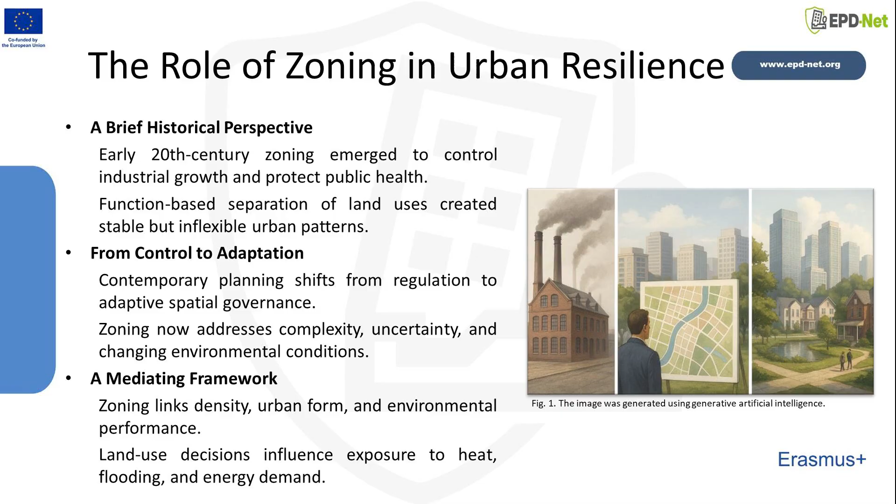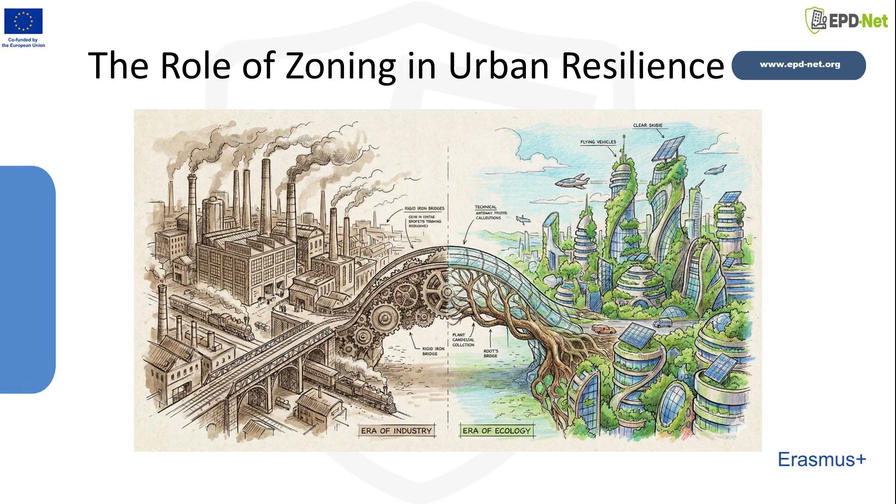Through the regulation of density, urban form, and land use intensity, zoning directly shapes environmental performance and resilience. Decisions about how land is allocated, how buildings are arranged, and how open spaces connect to ecological systems influence heat exposure, flood risk, and energy efficiency. In this way, zoning becomes not only a regulatory framework but also a dynamic mediator between the built environment and the natural systems on which cities depend.

Zoning systems were originally created to provide stability and predictability in urban development. They sought to organize land uses, prevent conflicts, and maintain a sense of order within the growing industrial city. However, the complex realities of the 21st century, such as climate change, rapid technological progress, and evolving social needs, have exposed the limitations of this fixed and prescriptive approach. Adaptive zoning offers an alternative way of thinking by transforming zoning from a static legal framework into a dynamic process of learning and adjustment. Instead of focusing solely on what can be built, it emphasizes how urban development performs over time in relation to environmental and social goals.

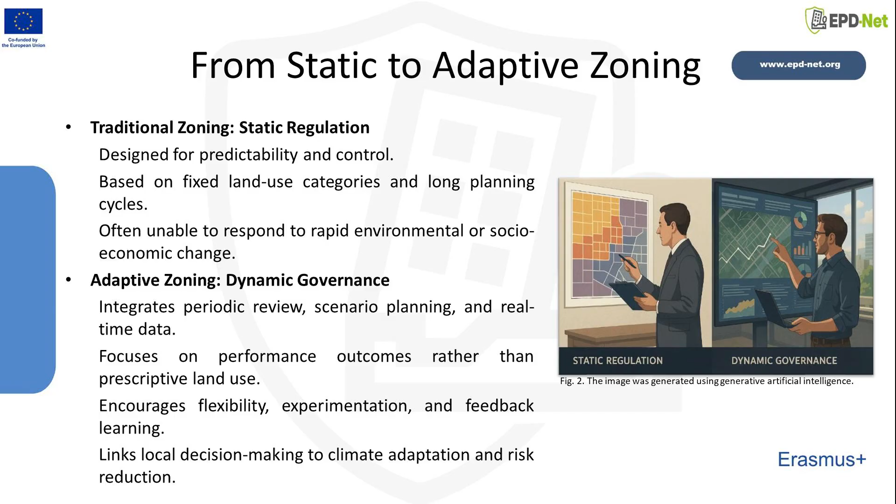It introduces regular review cycles, scenario-based planning, and data-informed evaluation so that local authorities can respond to emerging risks and new opportunities. Through this transformation, zoning becomes an instrument of resilience rather than rigidity. It enables cities to remain responsive, to integrate new knowledge, and to align land use, density, and environmental performance with the broader objective of long-term sustainability.

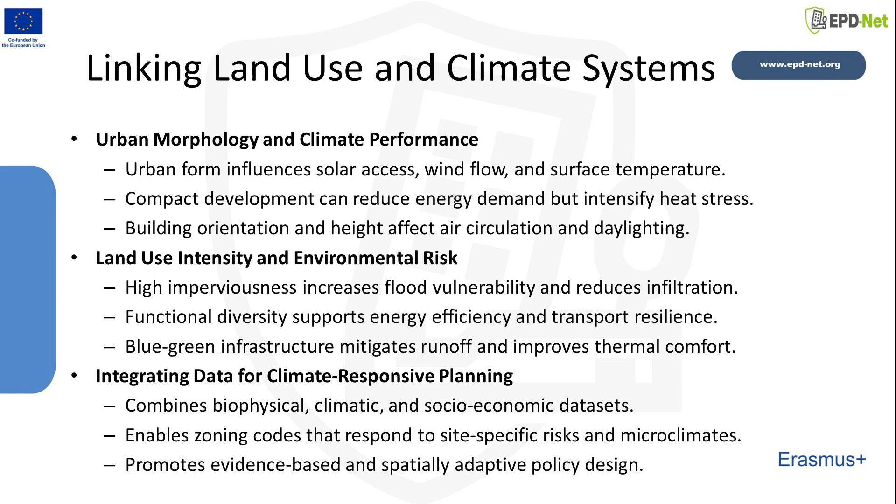The relationship between land use and climate systems lies at the heart of climate-responsive urban planning. Every decision about density, building form, and land use mix has measurable consequences for energy consumption, air quality, and local microclimates. The configuration of the urban landscape determines how sunlight reaches the ground, how air circulates through city blocks, and how heat and moisture are stored or released. Compact and high-density development can reduce transport-related emissions and strengthen social interaction, yet it can also intensify heat island effects if green and permeable surfaces are neglected.

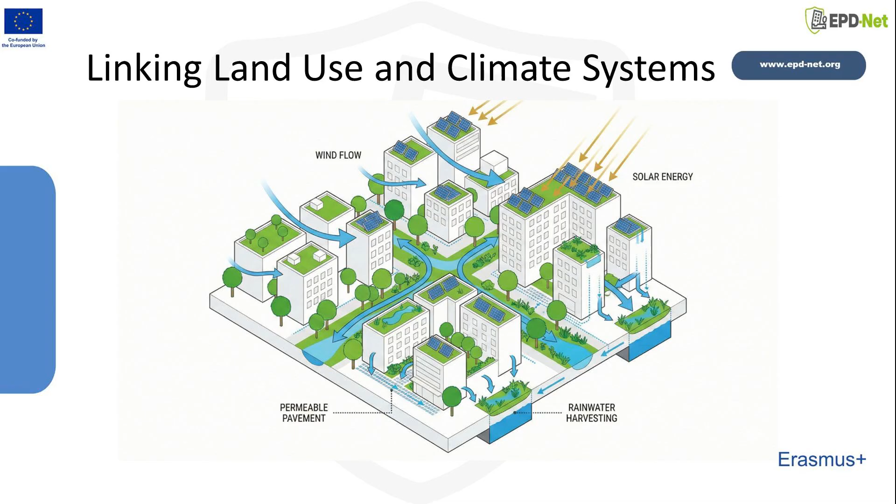Similarly, extensive impervious coverage can increase flood vulnerability, whereas integrating blue-green infrastructure can moderate temperature and enhance stormwater retention. Climate-responsive planning therefore requires a holistic perspective that links urban morphology with environmental processes. By using climatic, biophysical, and socio-economic data together, planners can design zoning codes that are both place-specific and adaptive, ensuring that urban form evolves in harmony with the natural systems that sustain it.

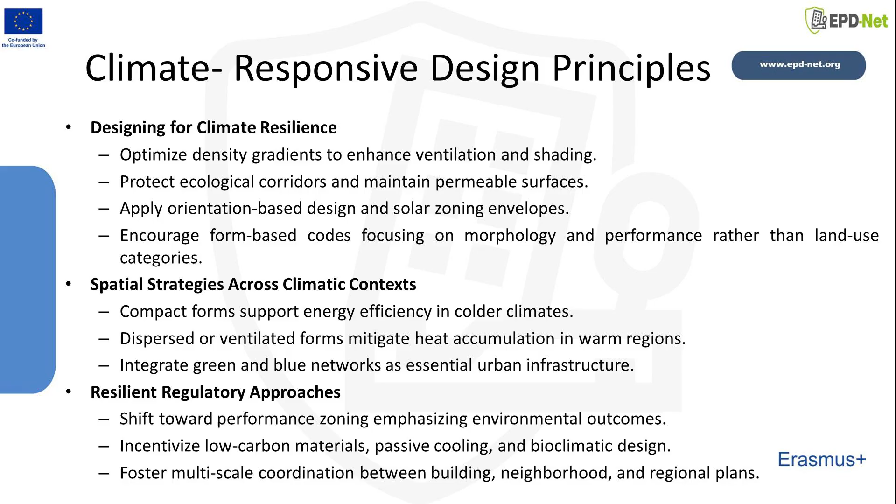Climate-responsive design lies at the intersection of architecture, urban planning, and environmental science. It is rooted in the understanding that urban form must not resist natural processes but instead work with them. The design of streets, buildings, and open spaces influences solar access, air movement, and surface temperatures, which together determine the comfort and energy performance of urban environments.

To achieve this, planners and designers should optimize density gradients to balance ventilation and shading while protecting ecological corridors and maintaining permeable surfaces for stormwater absorption. Orientation-based design and solar zoning help ensure that each development responds to the local sunpath, prevailing winds, and topography.

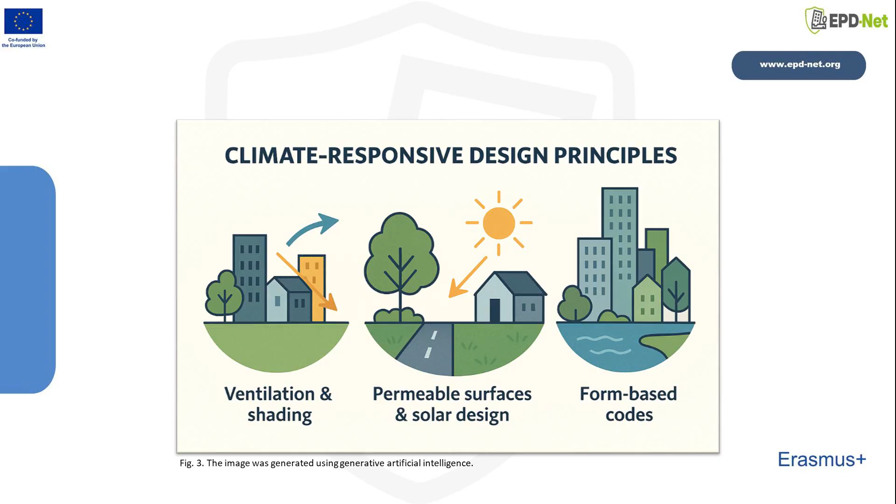Climate-responsive planning also calls for a shift from prescriptive land use regulation to performance-oriented zoning. Rather than simply dictating what functions may occur, this approach evaluates how spatial forms perform under different climatic conditions. By combining compact or dispersed urban forms according to context, cities can simultaneously reduce emissions, moderate heat, and enhance livability.

In the context of climate-sensitive urbanism, regulatory tools must extend beyond traditional zoning codes. The challenge is not only to define where and how we build but also to create the institutional capacity to govern adaptation processes over time. This involves integrating resilience goals directly into legal and administrative frameworks so that climate considerations become a prerequisite for development approval, rather than an optional add-on.

Economic and fiscal instruments also play a crucial role. Mechanisms such as adaptation funds, climate-linked fees, and tax incentives can mobilize private investment for public resilience outcomes. These tools transform abstract environmental targets into actionable, financeable interventions.

Equally important is the role of data and participation. Adaptive governance requires continuous monitoring, transparent reporting, and collaboration between citizens, planners, and decision-makers. Through these combined regulatory, economic, and participatory mechanisms, cities can evolve from compliance-oriented planning toward proactive, learning-based climate governance.

Blue-green infrastructure represents a fundamental shift in how we conceive and regulate urban space. Instead of treating water and vegetation as residual or decorative elements, this approach recognizes them as essential systems that support urban resilience. By embedding ecosystem services directly into the spatial and legal framework of cities, planners can transform ecological processes into infrastructure that delivers measurable social, environmental, and economic benefits.

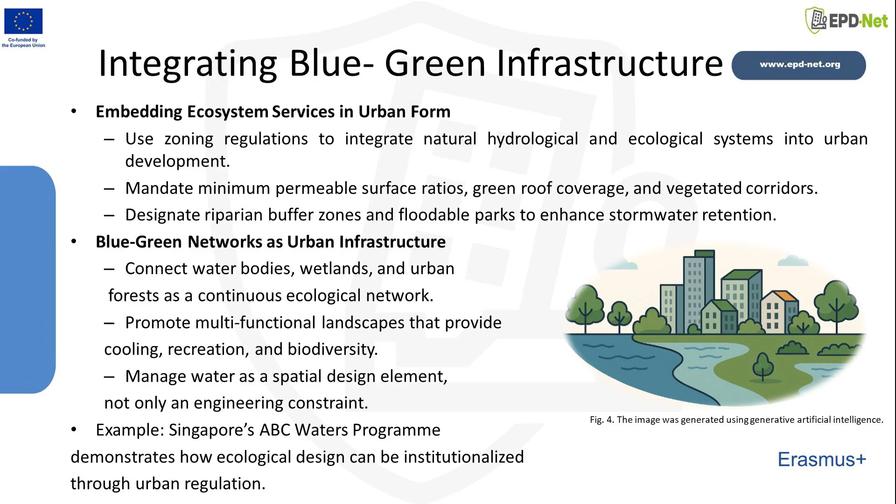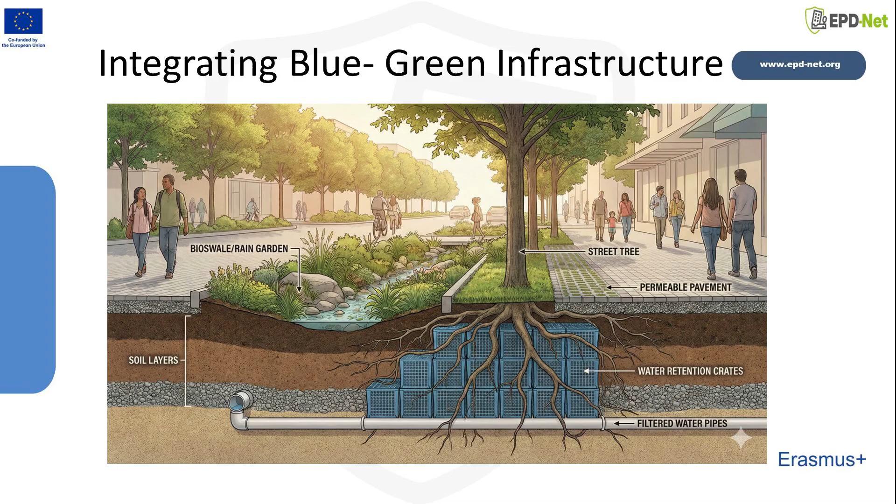The case of Singapore's Active, Beautiful, Clean Waters program illustrates how ecological thinking can become embedded in zoning and development codes. By linking environmental design with clear regulatory guidance, cities can achieve both environmental sustainability and climate resilience in a coherent and measurable way.

Adaptive zoning represents a new generation of regulatory practice that connects spatial planning directly to evolving climate risks. Instead of relying on static, once-approved maps, this approach uses dynamic GIS data to continuously update zoning designations based on real-time information about flood levels, surface temperatures, and hazard probabilities.

Through adaptive zoning, local governments can create resilient districts and climate overlay zones that apply context-specific design and development standards in vulnerable areas. For example, Rotterdam has pioneered flood-adaptive zoning that combines mixed-use waterfront redevelopment with multifunctional dikes, turning protective infrastructure into public space.

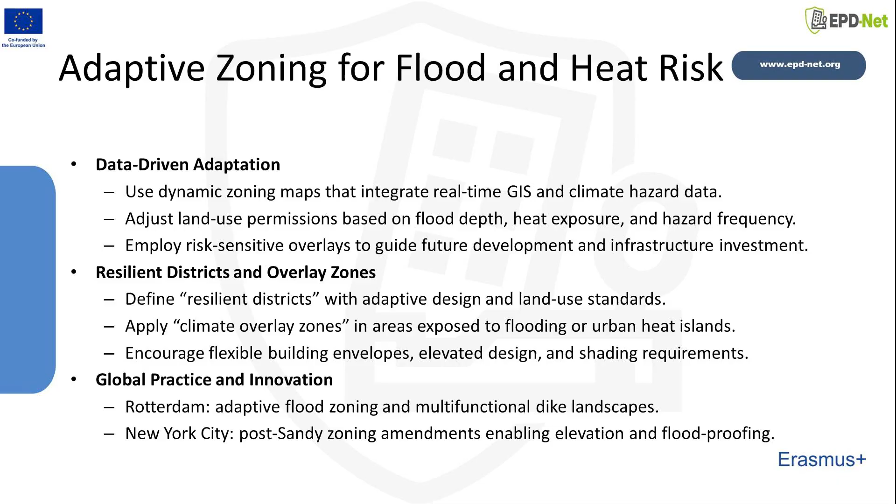Similarly, following Hurricane Sandy, New York City amended its zoning code to allow building elevation, flexible setbacks, and climate-resilient retrofits without violating existing regulations. This data-driven, feedback-based approach transforms zoning into a living instrument of climate governance. It enables continuous learning, scenario testing, and regulatory agility, ensuring that cities remain responsive to both short-term hazards and long-term climatic uncertainty.

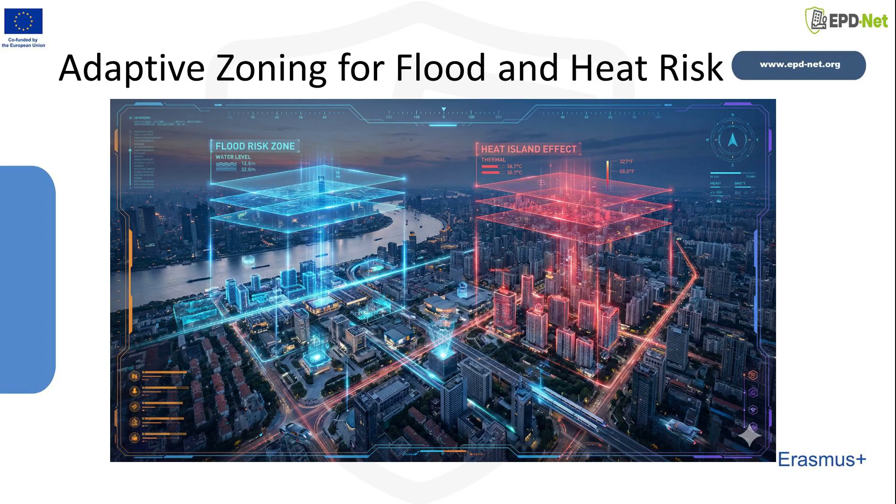Governance and institutional design form the backbone of any successful climate-sensitive planning system. Even the most technically advanced zoning regulations are ineffective without coherent coordination among the institutions responsible for their implementation. Effective governance therefore requires collaboration between national ministries, regional authorities, and local municipalities so that environmental, planning, and disaster management policies reinforce rather than contradict one another.

Decentralization plays a critical role in this process. When local governments have both the authority and capacity to interpret national guidelines, they can adapt regulatory frameworks to their own climatic, social, and economic realities. This allows for a bottom-up form of resilience planning that reflects community priorities while remaining aligned with national objectives.

A strong example can be found in Japan, where the Land Readjustment and Resilience Planning Act integrates redevelopment, disaster risk reduction, and infrastructure design into a unified institutional process. This model demonstrates that resilience is not only a technical outcome but also an institutional achievement, grounded in coordination, trust, and long-term governance continuity. Data and digital technologies are transforming the way cities plan for resilience.

Geographic information systems and artificial intelligence now allow planners to move beyond static maps toward dynamic, scenario-based modeling.

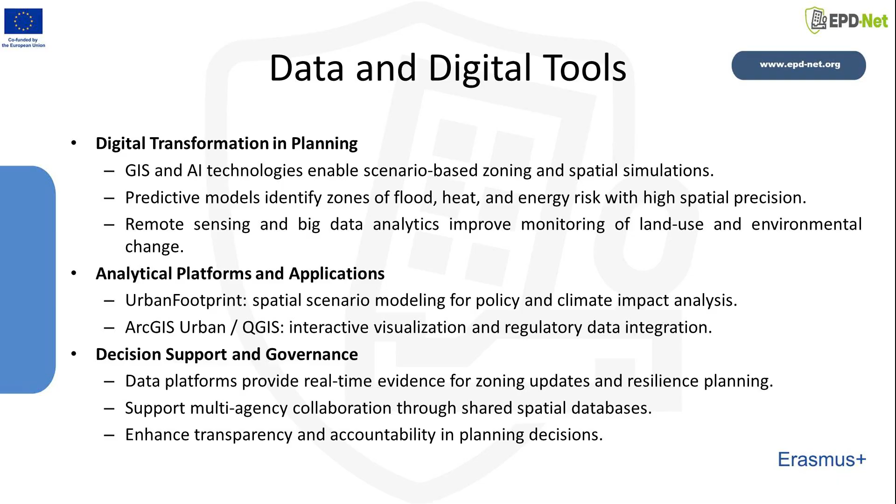By integrating real-time environmental and socio-economic data, cities can identify which areas are most exposed to flooding, heat stress, or energy inefficiency and can test different regulatory or design responses before they are implemented. Analytical platforms such as UrbanFootprint, ArcGIS Urban, and QGIS exemplify this new generation of decision support tools. They combine spatial data, climate projections, and land use models to simulate how zoning decisions influence emissions, accessibility, and risk distribution across a metropolitan area.

These digital systems do more than visualize information; they create the foundation for data-driven governance. By enabling continuous monitoring and interagency data sharing, they make urban planning more transparent, adaptive, and evidence-based. That is a crucial step toward building cities that can learn and evolve in the face of uncertainty.

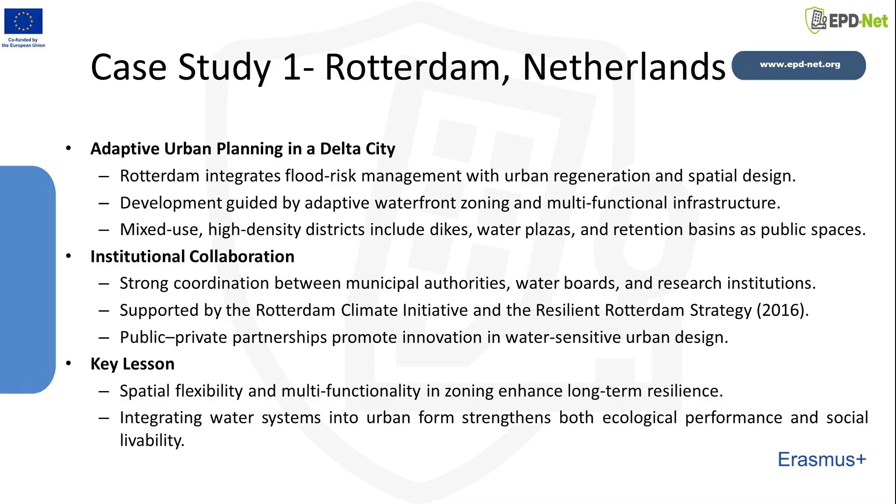Rotterdam provides one of the world's most influential examples of how a city can integrate flood risk management into its spatial planning and zoning frameworks. Situated in a delta region that lies largely below sea level, Rotterdam has transformed its vulnerability into an opportunity for design innovation. The city's adaptive waterfront zoning approach links urban development with hydraulic engineering, ensuring that each new district contributes to flood protection, water storage, and climate adaptation.

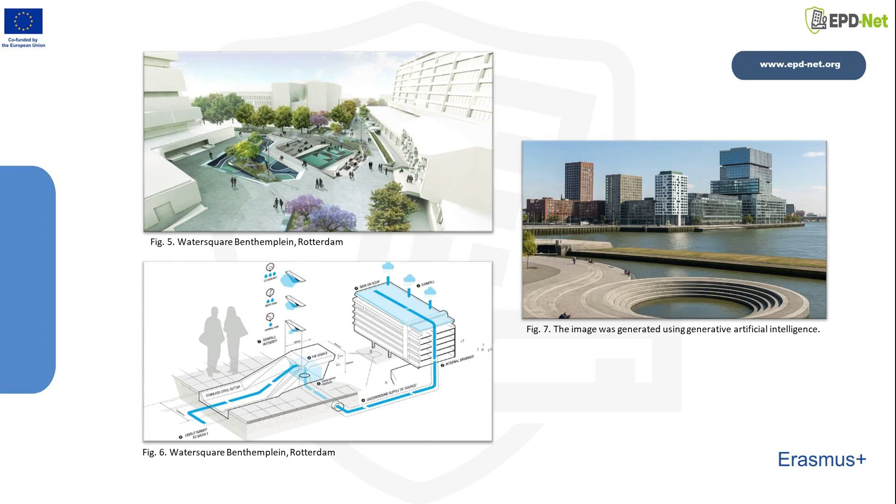Projects such as the water squares at Benthemplein and the multifunctional dike systems along the Maas River exemplify this philosophy. These spaces serve dual purposes, functioning as recreational and cultural venues in dry conditions while retaining stormwater during heavy rainfall. Institutional collaboration has been critical to this success. Partnerships among the municipality, water boards, universities, and private developers have produced a governance culture grounded in learning and experimentation.

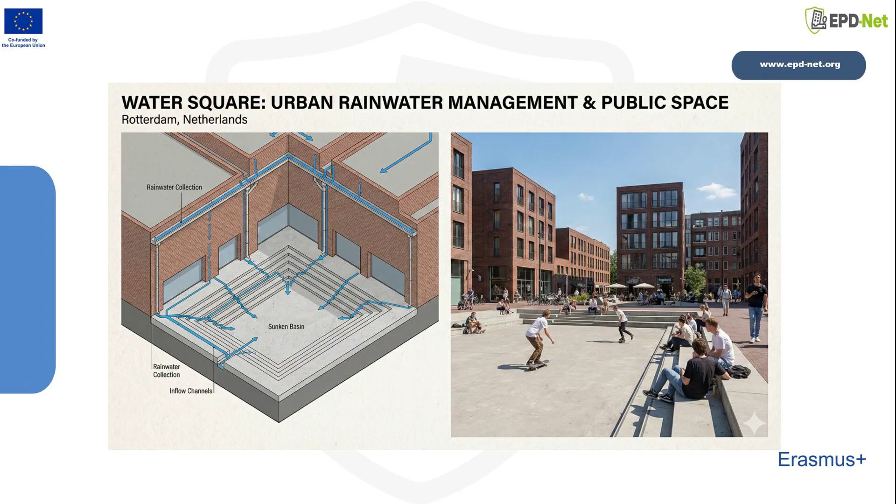The key lesson from Rotterdam is that resilience emerges not from isolated infrastructure projects, but from the capacity of planning systems to integrate risk management, ecological design, and urban livability within a flexible and adaptive regulatory framework.

New York City offers a powerful example of how legal and institutional adaptability can transform crisis into opportunity. After Hurricane Sandy in 2012, the city initiated the Resilient Neighborhoods Initiative, a pioneering program that worked directly with local communities to redesign zoning and development regulations in flood-prone areas. This initiative recognized that resilience cannot be imposed through top-down mandates alone. It must be built collaboratively through inclusive planning and localized governance.

The city subsequently introduced a series of zoning text amendments that allowed property owners to elevate buildings, install green retrofits, and adopt energy-efficient systems without violating pre-existing regulations. The creation of special coastal risk districts formalized this adaptive approach, setting differentiated standards for density, setbacks, and materials depending on exposure to coastal hazards.

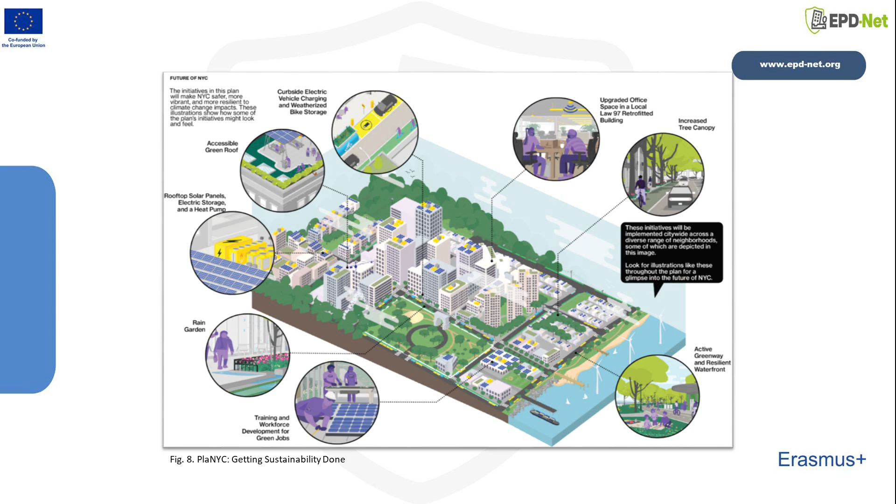These changes were embedded within a broader strategic framework, OneNYC 2050, which integrates climate resilience with social equity and environmental justice. The central lesson from New York City is that legal adaptability and community engagement are as essential to resilience as physical infrastructure. By aligning policy innovation with social inclusion, the city has turned adaptive zoning into a cornerstone of climate-responsive governance.

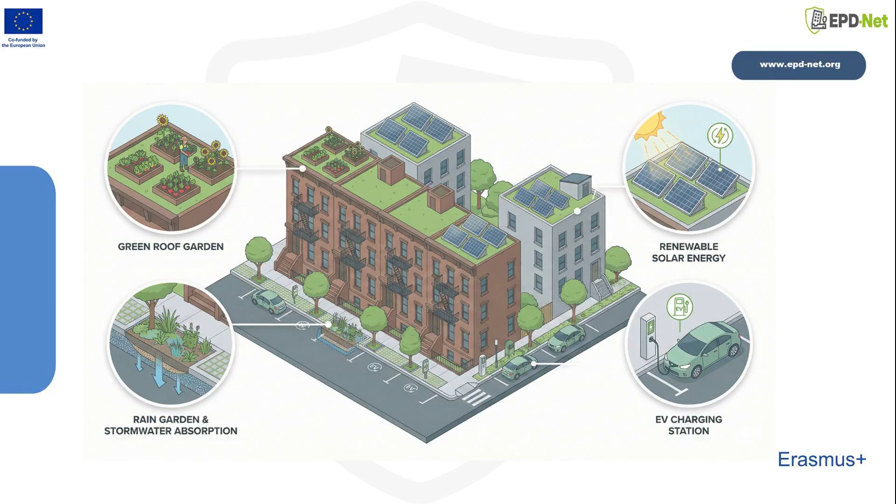This slide presents the Singapore case through the lens of performance-based green urbanism. The LUSH program, which stands for Landscaping for Urban Spaces and High-Rises, promotes the integration of green infrastructure not only in horizontal open spaces but also within high-rise buildings and dense urban environments. In this context, the green plot ratio targets established for both private and public developments make the level of urban greenery a measurable and controllable planning criterion. Applications such as vertical greening, rooftop gardens, and sky terraces represent the spatial outcomes of this approach.

The second emphasis of the slide is the integration of zoning decisions with environmental data. In Singapore, the zoning system is linked to microclimate modeling, biodiversity corridors, and environmental performance indicators, moving beyond a development logic based solely on aesthetics or density. In this process, coordination among institutions such as the Urban Redevelopment Authority, the National Parks Board, and the Building and Construction Authority enables environmental goals to be effectively incorporated into planning and implementation processes. As a result, urban development is understood not merely as physical growth, but as a transformation process that enhances environmental quality.

Finally, the measurable impacts of this approach are particularly significant. Reductions in temperature in high-density districts, increases in urban biodiversity, and improvements in overall livability are among the main outcomes of the Singapore model. For this reason, Singapore represents a strong case study demonstrating the positive effects of green zoning on health, livability, and resilience, while also offering a replicable model for climate-responsive and ecologically productive cities.

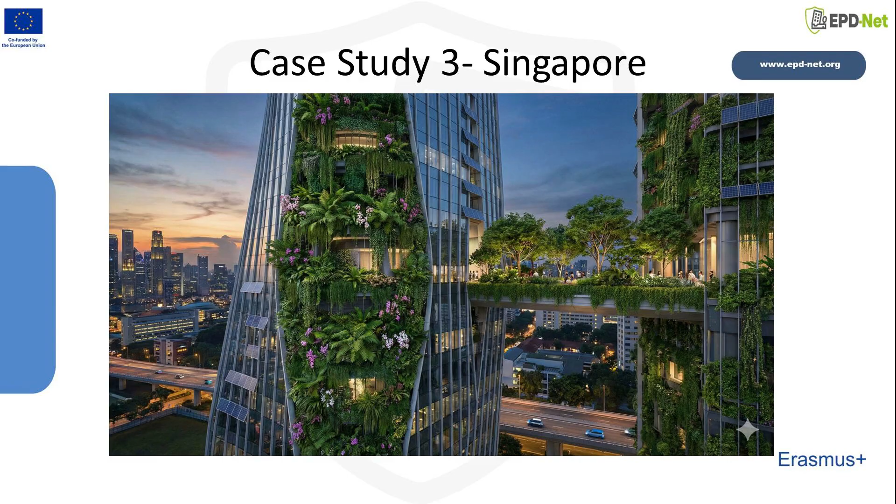At the same time, it contributes to the creation of a healthier and more resilient urban environment by improving the quality of life in areas dominated by dense development. In this respect, the Singapore case can be regarded as an important example that illustrates how green infrastructure can be integrated into high-rise building typologies and offers a strong model for climate-responsive urban design.

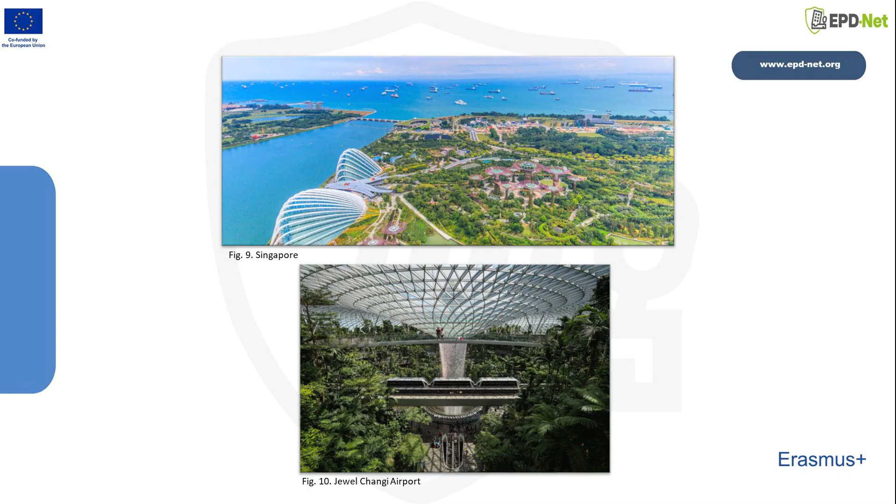This integrated structure offers a model in which natural systems are incorporated into urban planning, and ecological continuity is addressed together with public accessibility. In the case of Singapore, green spaces are regarded not merely as recreational areas, but also as strategic infrastructure elements that support climate adaptation, environmental performance, and urban livability.

The lower image, through the example of Jewel Changi Airport, demonstrates a public space experience in which architecture and landscape are closely intertwined within an enclosed yet ecologically designed setting. The dense planting, water features, and circulation areas created beneath the wide-span glass roof show how nature can be deliberately introduced into an artificial interior environment.

This approach is significant because it demonstrates that biophilic design principles can be applied even in high-density and technologically advanced urban contexts. At the same time, it reflects how factors such as user comfort, visual quality, microclimatic regulation, and psychological well-being are becoming increasingly central in contemporary urban design and architectural practice.

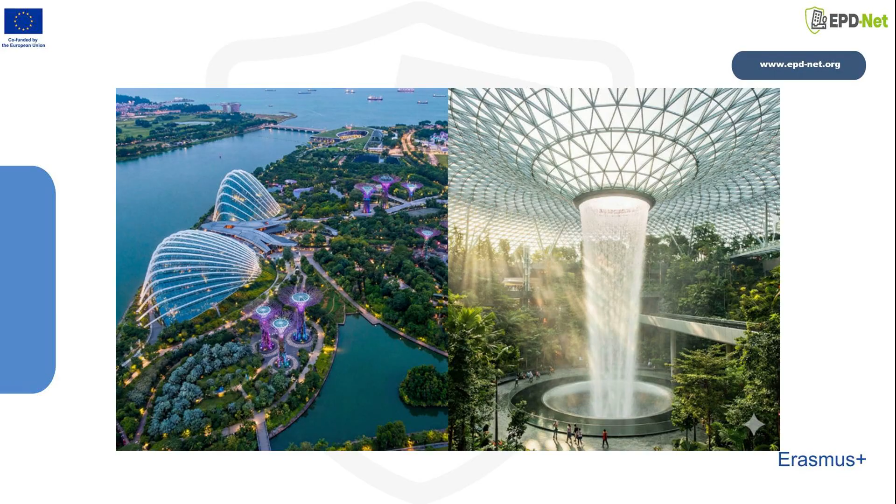Equity and climate justice are essential considerations in climate-responsive zoning, since the benefits and burdens of environmental change are not distributed evenly across urban populations. While zoning reforms have the potential to reduce climate risk, they can also deepen social inequalities if they lead to rising property values, displacement, or the concentration of green amenities in already advantaged neighborhoods.

To avoid these outcomes, zoning must incorporate explicit mechanisms that promote fairness and inclusion. This includes combining climate adaptation goals with affordable housing requirements, guaranteeing equitable access to parks and ecological infrastructure, and ensuring that resilience investments do not inadvertently marginalize low-income or historically underserved communities.

Procedural justice is equally important, as communities must have a genuine voice in shaping the policies that affect their everyday lives. Durban provides a compelling example of how community participation can reshape zoning for climate adaptation. Through participatory mapping and neighborhood-level engagement, the city developed a framework that links local knowledge with formal planning processes. This approach demonstrates that climate resilience is not only about adapting physical systems but also about supporting social resilience through inclusive, just, and community-centered planning.

Moving toward integrated zoning for climate-responsive cities requires a fundamental shift in how planning systems define and coordinate their objectives. Rather than treating adaptation, mitigation, and social equity as separate themes, integrated zoning merges these priorities into a single policy framework. This ensures that climate resilience measures support decarbonization goals and that both are implemented in a way that advances fairness and inclusion. Achieving this requires cross-sectoral and multi-scalar collaboration.

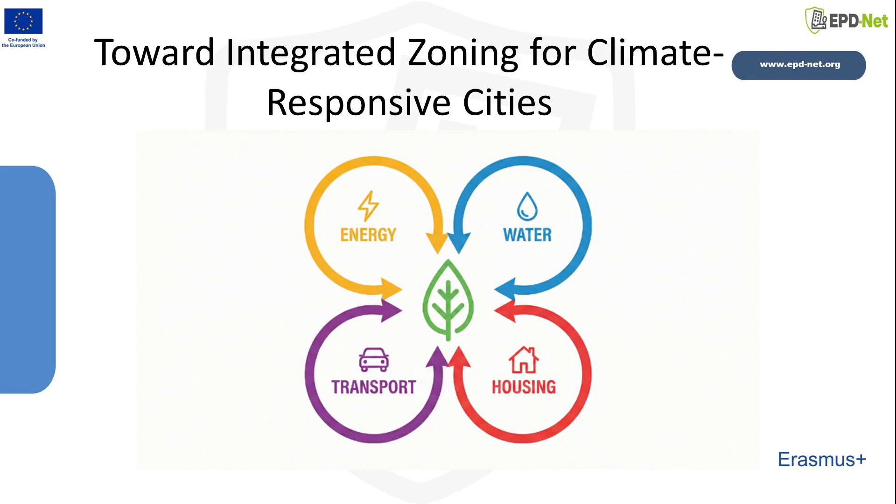As we conclude this module, it becomes clear that zoning is no longer simply a mechanism for regulating land use. Instead, it has become an adaptive governance tool that can help cities respond to accelerating climate risks and complex socio-economic challenges. When zoning frameworks incorporate flexibility, periodic review, and data-informed decision-making, they contribute to more resilient and equitable urban futures.

Climate-responsive zoning also depends on broadening the sources of knowledge that inform planning decisions. Integrating environmental science, microclimate data, social vulnerability assessments, and community priorities ensures that spatial regulations reflect the realities of both ecological systems and human needs. Looking ahead, the future of zoning will increasingly rely on predictive modeling, artificial intelligence, and participatory technologies. These tools allow cities to test scenarios, anticipate hazards, and adapt regulations proactively.

Finally, no zoning reform can succeed without strong institutional foundations. Public engagement, capacity building, and cross-sectoral coordination underpin effective implementation. These elements ensure that climate-responsive zoning is not only technically sound but also socially legitimate and institutionally durable.